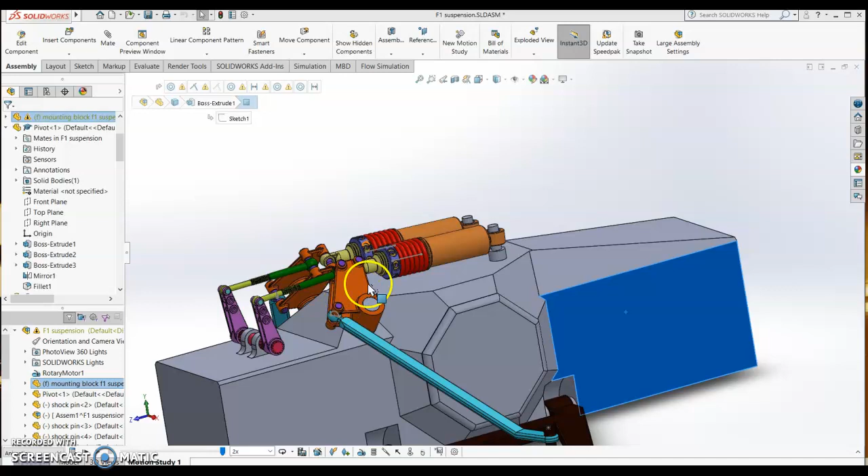Right, on this video we are going to design the pivot for this F1 suspension. So we see how it is designed. So this is the pivot design.

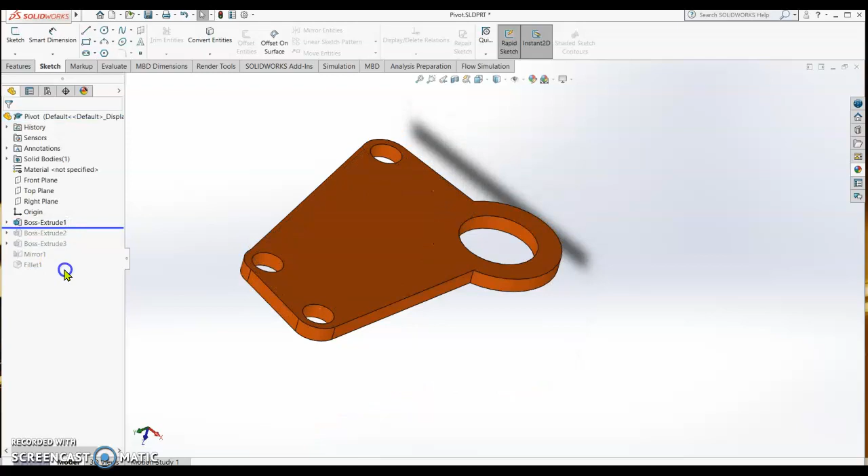Alright, so the first sketch that is done is this sketch. Right, normal to.

Okay, the sketch is you got one big circle and a small circle. The small circle diameter is 25 and the big circle is 40 mm, and then we draw construction line.

Vertical. Okay, the height or the length is 80 mm. All right, another construction line, the length is also 80 mm, and then another construction line, the length is 50 mm. So this is horizontal. So the degree between this construction line and the horizontal is 70 degree.

All right, so on each end of the construction line we are going to draw a circle, two circles. One diameter is 10 mm and the other is 15 mm. So similarly on this end also 15 mm and 10 mm.

So it's the same on the horizontal construction line. On the end we are going to draw it 10 mm as well as 15 mm. So after that we are going to draw a line connecting this circle and this circle, so it is horizontal line. Right, and then another line from this point to this point, connecting the two circles. So same thing on this line, right, same thing on this line.

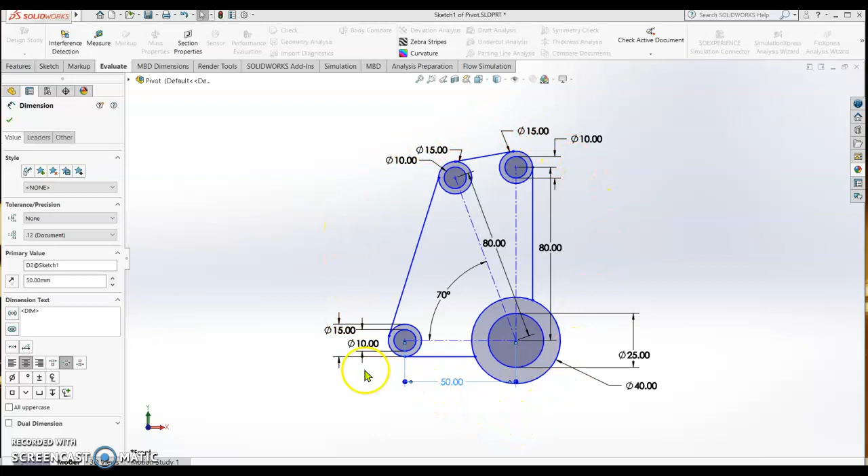Okay, so after making your sketch we are going to Boss-Extrude. Okay, so we check. So close the sketch and it is Boss-Extrude. How much is the Boss-Extrude? So it extrudes both in blind by 5 mm.

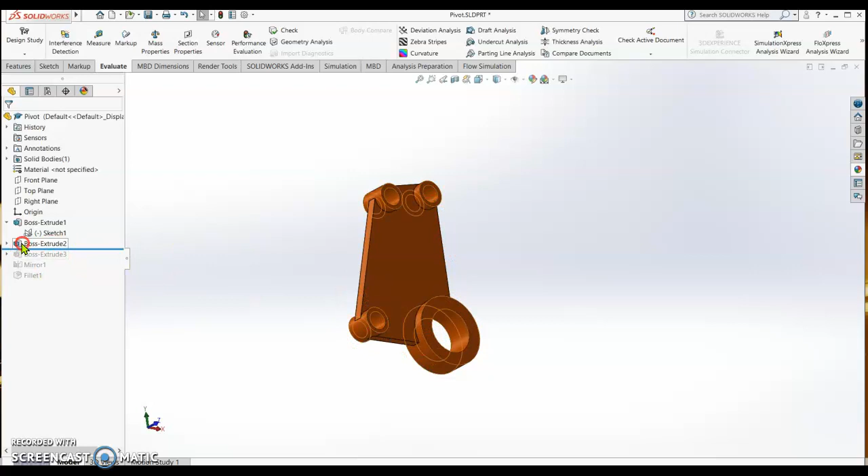Right, check. So the next Boss-Extrude that is been done is this part. So all the circles have been extruded, using the same sketch. So if you notice the sketch is still the same. Okay, so the same sketch is used.

So only when it is Boss-Extrude, okay, we select 4 regions. What are these 4 regions? All right, 10 mm and it is blind. Okay, so another second direction is 5 mm and it's also blind.

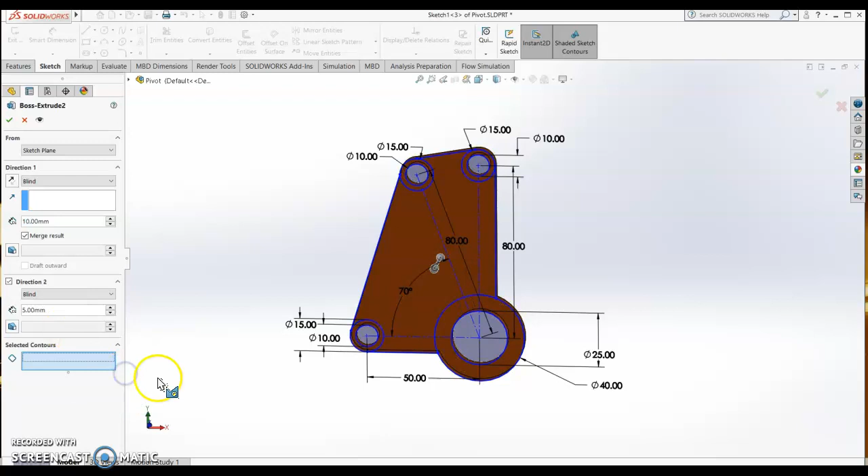So we delete first this region, clear all the selection, and then I select the region. This is 1, okay, this is 2, this is 3, and this is 4 region. So 10 on blind and 5 on the second direction.

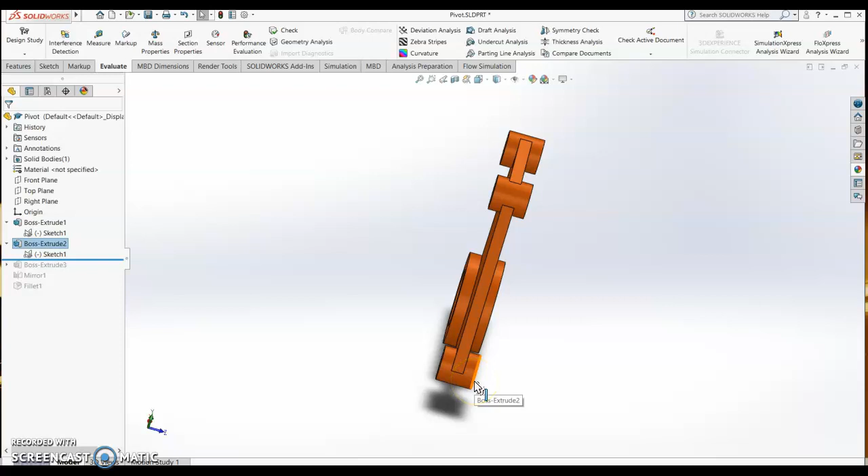Check. So if you notice, it is extruded almost that the distance from the main plate is the same. Okay, a distance of 5 millimeter. Remember, it is extruded by 5 mm, then we extrude by 10 on this side and 5 on this side. So a total of 15 mm.

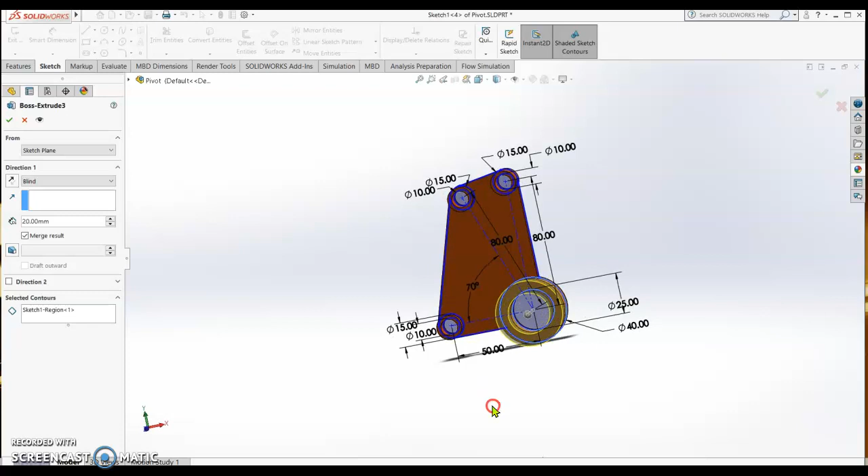Then the next part that is extruded is this portion. So still the same sketch is used. Alright, but the selected region is only this part and it is 20 mm. So if I clear this selection, okay, we select this region only there and then check.

So after that it's been mirrored. Okay, so to mirror we just edit sketch. We can delete this mirror. Okay, delete. Yes, I'll show you how it is mirrored.

All right, so we can just click this face and then we go here on the features. We got here mirror, so we mirror. So this face is used to mirror, so we go to bodies to mirror. So you're going to expand, not the faces, not the features, but bodies to mirror.

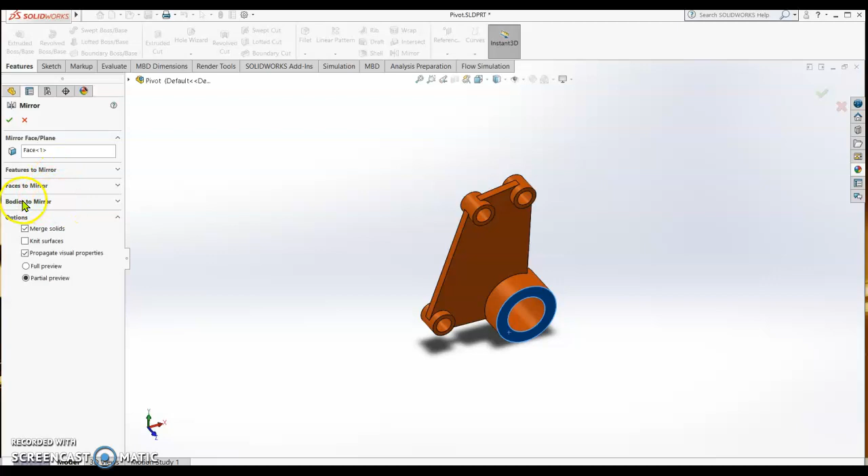So we select this body. After that, we check. So it's already been mirrored. So to make it nice, we are going to make some fillet.

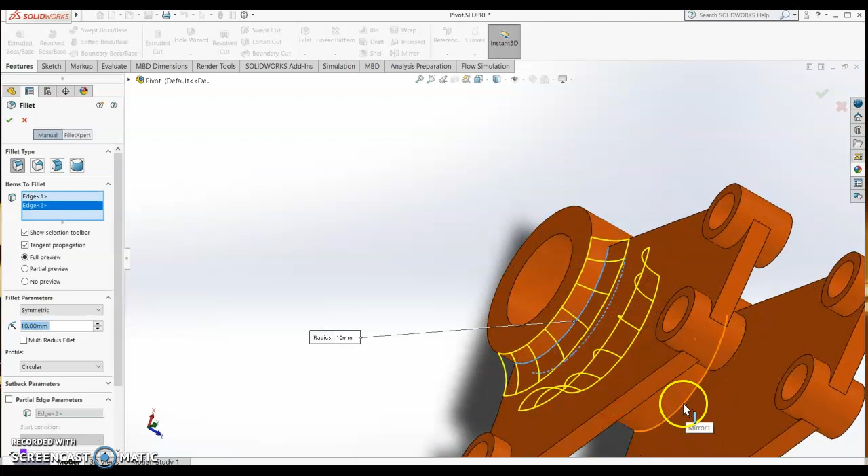So on fillet features, we are going to select this edge. Alright, select this edge. Similarly on this edge and this edge. This is too big, we can change to 5 mm.

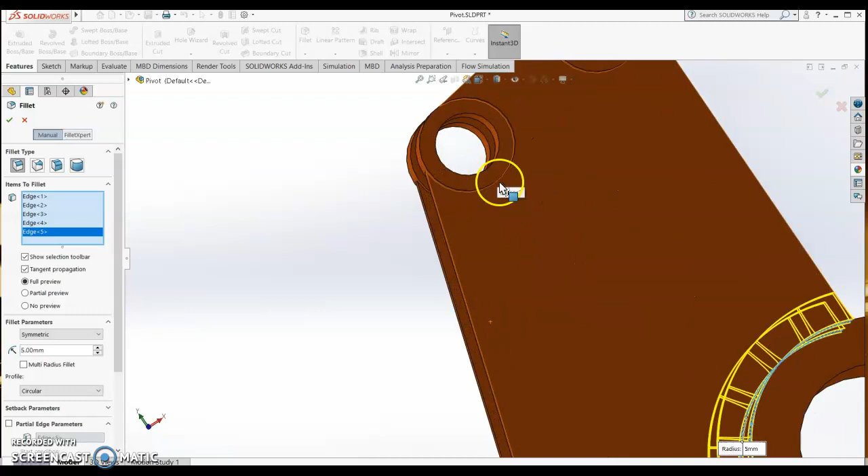Alright, so all this you can also make the filleting. Alright, on all the edges there.

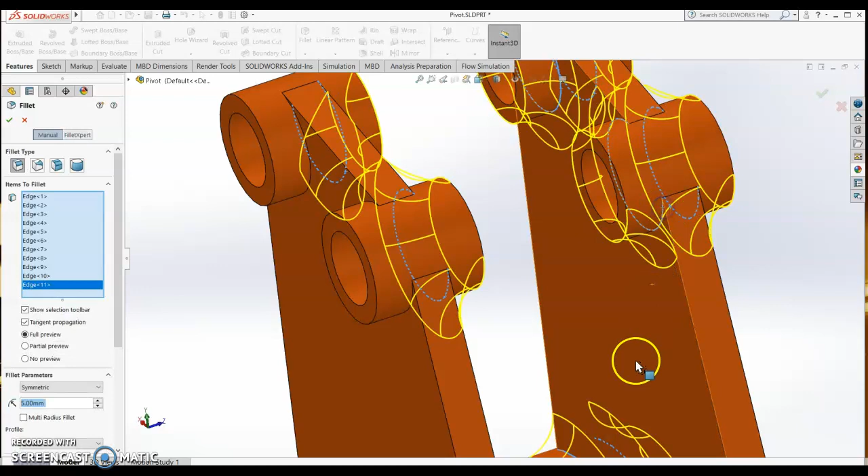So similarly inside, same thing here, and then also the other side, this side, this side, and also this side. Alright, and this side and this side.

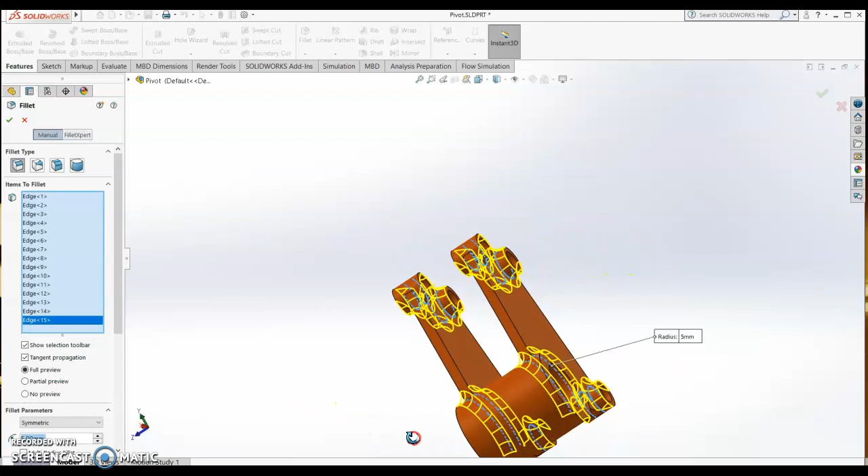So let's check if all is already been filleted. So I think all is already filleted. So the fillet is done.

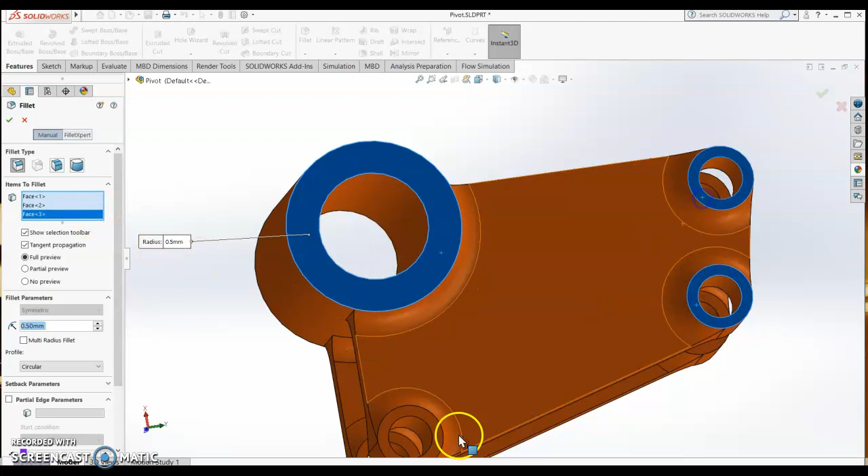Okay, on these edges we can also fillet, but only a small portion, maybe only 0.5 mm. Okay, so let's see this face. Let's check working. Okay, doesn't work, so it means this 0.5 is too much, so we just clear it.

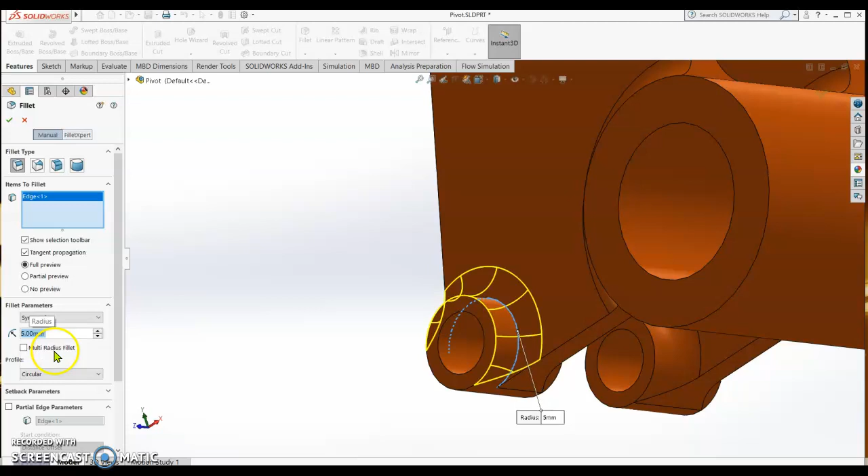So not nice. Oh, we missed one here. We can fillet this one also by 5. Alright, so it's done. So this is now our plate, the pivot plate.